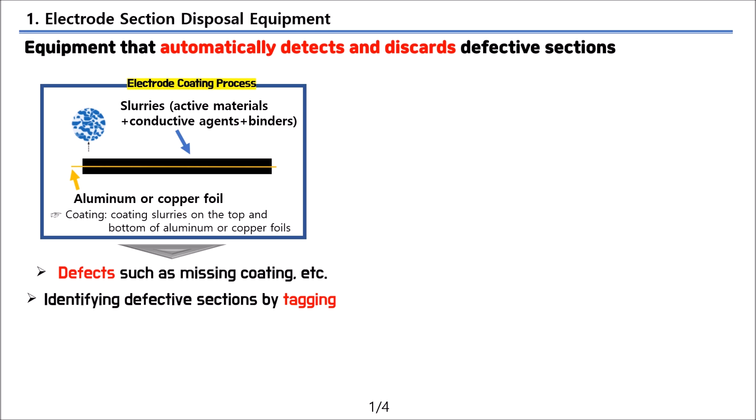The roll press process increases the electrode density of the coated electrodes. The workers manually check and discard defective products generated during the coating process, pick out only good products, and feed them into the roll press. It is time-consuming to do the job of connecting the discarded pieces to the roll to reel them in and reattach the good ones to the existing products. It also increases the workload and creates many safety hazards.

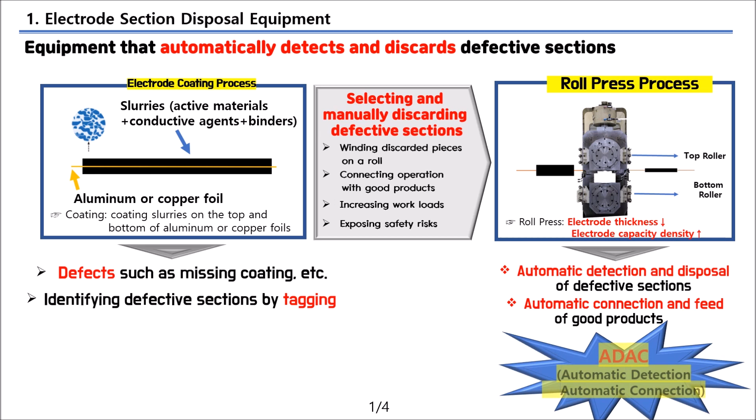This equipment, called electrode section disposal equipment, solves these problems. Only high-quality electrodes are fed into the roll press. It automatically identifies and eliminates faulty ones beforehand. To briefly explain the operating principle of the electrode section disposal equipment, when the tag at the beginning of the disposal section is detected by the sensor, operation stops and cutting is performed on electrodes.

Then the guide plate advances a certain degree in the direction of electrode movement to create space for the bobbin to be situated. Afterwards, when the bobbin comes up from the bottom, the jog roll is activated to move the electrode to be discarded to the center of the bobbin. At the first time, the electrode is wound onto the bobbin by suction. From the second time, the discarded electrodes are connected to the bobbin by taping.

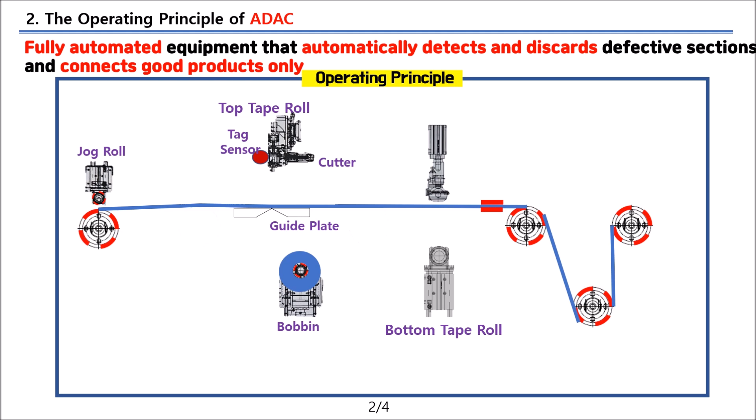When the tag at the end of the disposal section is detected, the operation stops, the electrode is cut, and the bobbin descends. After the bobbin is down, the guide plate moves to the original position to tape the top sides where the good electrodes meet and move the electrodes forward to the bottom taping roll. By taping from this point to the bottom sides where the electrodes meet, the electrodes get connected. After completing taping both the top and bottom sides, normal operation resumes to feed good electrodes to the roll press.

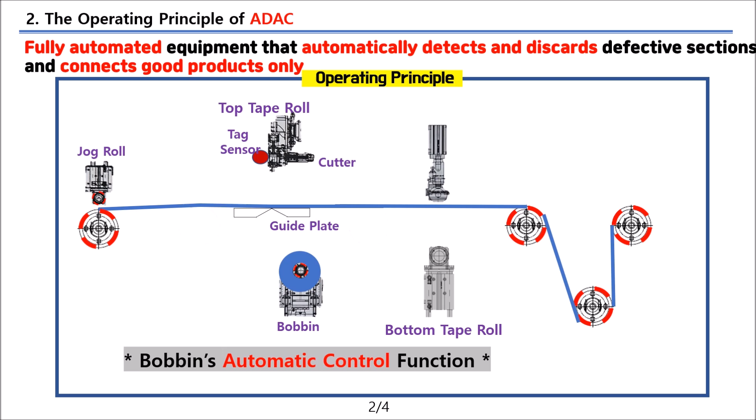In particular, since the size of the bobbin increases as the discarded electrode winds, it is automatically controlled to avoid interference between the electrode and the bobbin. This equipment has the feature of automatically separating discarded electrodes while repeating this cycle and feeding only good quality electrodes into the roll press. The bobbin is the technical key of this section disposal equipment.

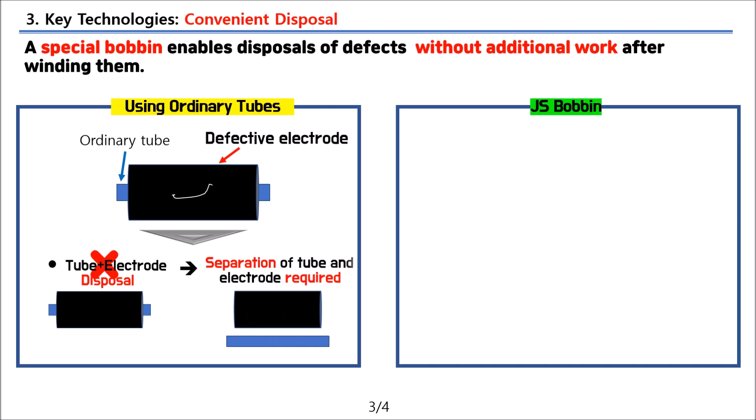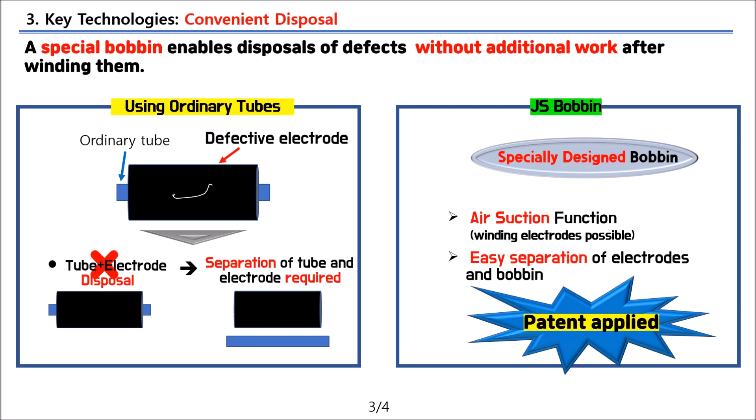When ordinary tubes are used, they cannot be disposed of together with electrodes. Therefore, an additional process, such as the separation of the tubes, is required. However, as for our specially designed bobbin, with a suction function added to the equipment, the electrodes can be wound without the need for any other tools when connecting a defective electrode for the first time. Then the electrodes can be easily separated from the bobbin after winding, and only the defective electrodes can be easily disposed of without additional work. Let's watch the actual operation video.

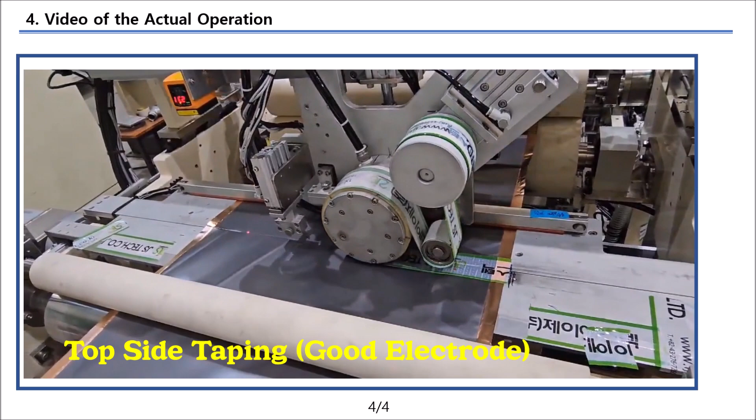This concludes the presentation of our electrode section disposal equipment for secondary batteries, which automatically disposes of defective electrode portions while putting good electrodes only into the roll press.